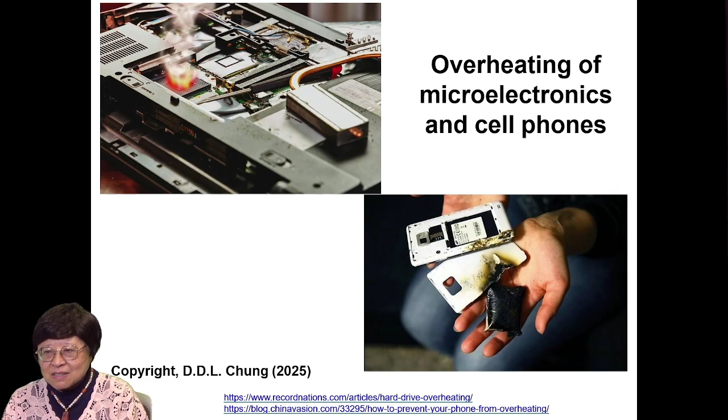Overheating of microelectronics and cell phones is a big problem, and the heat source is very often the microprocessor. So overheating limits reliability, limits further miniaturization, and limits power. Not only microelectronics and cell phones, but also light-emitting diodes need heat dissipation, and electric vehicles with battery packs. The battery needs heat dissipation.

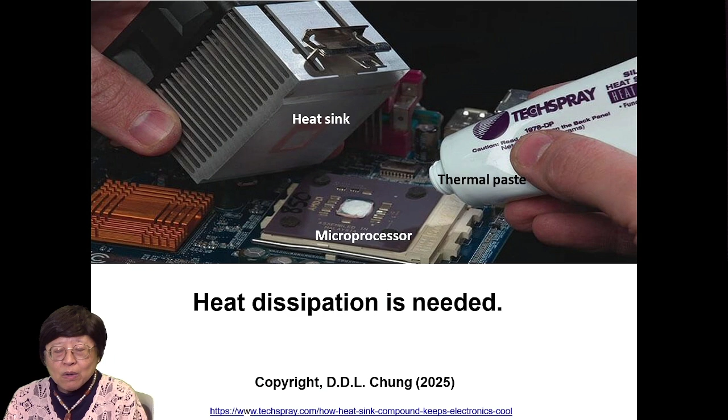Now, how to improve the heat dissipation? Let's say you have a microprocessor and a heat sink above, and you need to improve the thermal contact between these two. So one puts in between the two a thermal interface material, abbreviated TIM. Most often it is in the form of a paste called thermal paste, because the paste is easy to dispense and also low in cost.

TIM market size is increasing, particularly large increase is projected from now to 10 years from now. It's projected to exceed $7 billion by year 2036, with annual increase of around 10%.

The electric vehicle battery is one big area. Also, 5G is another big area. The application sectors include consumer electronics, electric vehicles, data centers, advanced semiconductor packaging, advanced driver assistance system sensors, 5G infrastructure, aerospace and defense, industrial electronics, renewable energy systems, and medical electronics. In particular, consumer electronics is the largest market segment, including smartphones, tablets, and wearable devices.

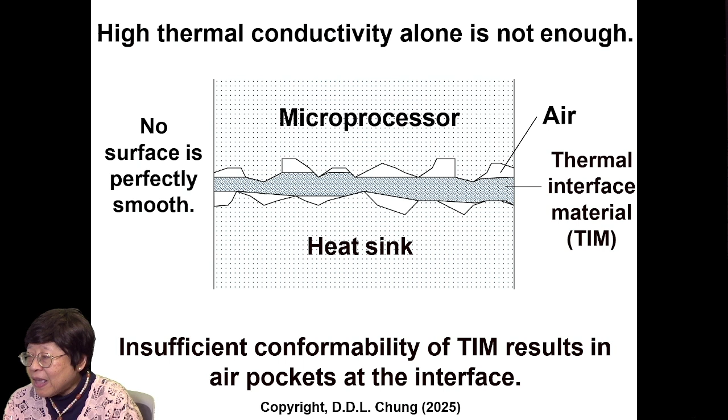Now, high thermal conductivity for the thermal interface material alone is not enough. The reason is no surface is perfectly smooth, so you always have some ups and downs, some air pockets at the interface. The thermal interface material must enter all these little valleys and displace the air out. If you have insufficient conformability of the TIM, you would have air pockets left at the interface, and air is a thermal insulator.

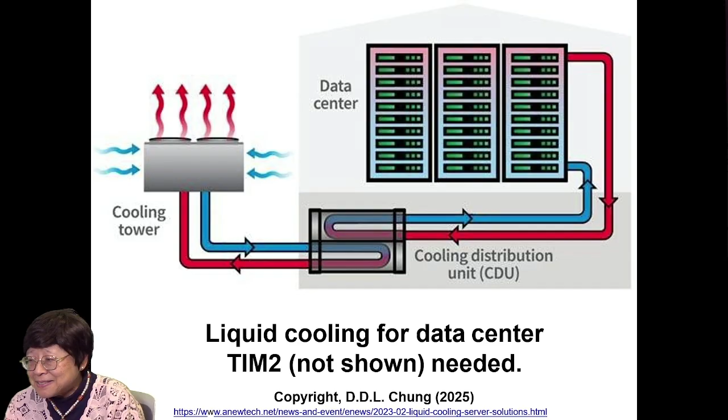For data centers, liquid cooling is the main method of cooling, but it uses a massive amount of water. That is another problem. And TIM2, although not shown here, is needed.

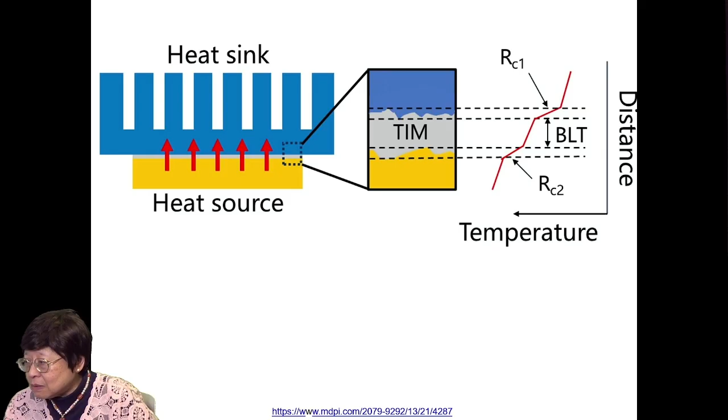This shows that the temperature drop occurs not only within the TIM, but also at each of the two interfaces between the TIM and the adjoining material. So there are three temperature drops here.

The design principle of thermal interface material has long been one thing, which is high thermal conductivity. However, I put forth that there should be another principle, which is very important, and that is conformability. And that results in a paradigm shift in the design principle of thermal interface material. I raised that point back in 2003.

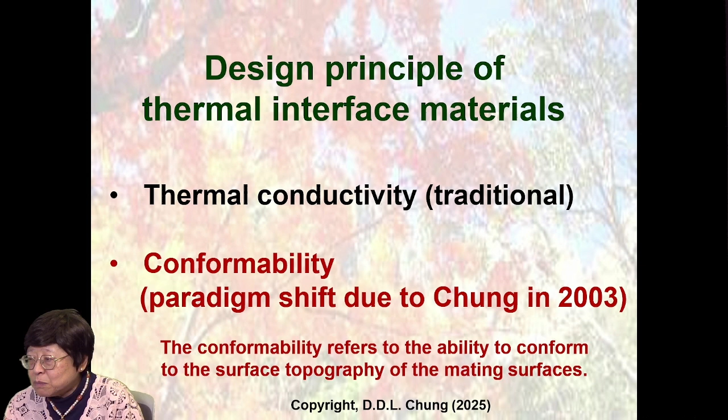The conformability refers to the ability to conform to the surface topography of the adjoining surfaces. I should stress that conformability requires micro-scale kind of conformability. That is different from macro-scale kind of resiliency or macro-scale compressive modulus being low or soft, because the little valleys in the surface topography can be in the micro scale. Silicone, for instance, is resilient and soft, but typically not conformable in the micro scale due to the long length of the molecules.

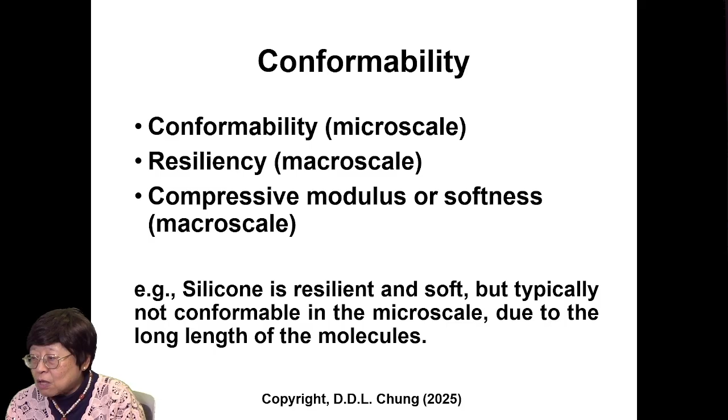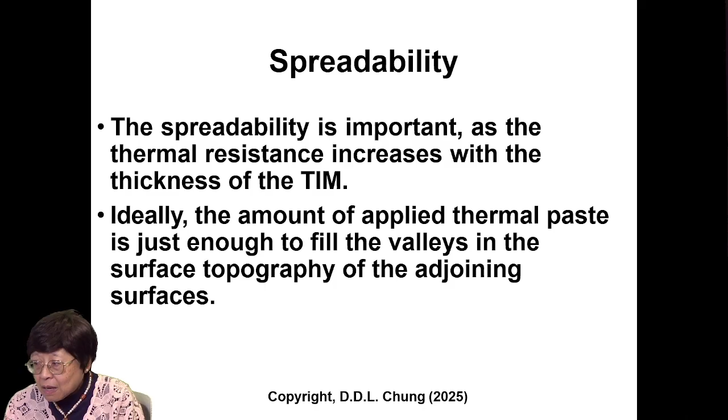Spreadability is also important, as the thermal resistance increases with the thickness of the TIM. Ideally, the amount of applied thermal paste is just enough to fill the valleys in the surface topography of the adjoining surfaces. The properties that affect TIM performance include conformability, spreadability, and thermal conductivity. The thermal paste has in it a solid component and a liquid component. We want both the liquid and solid components to be conformable.

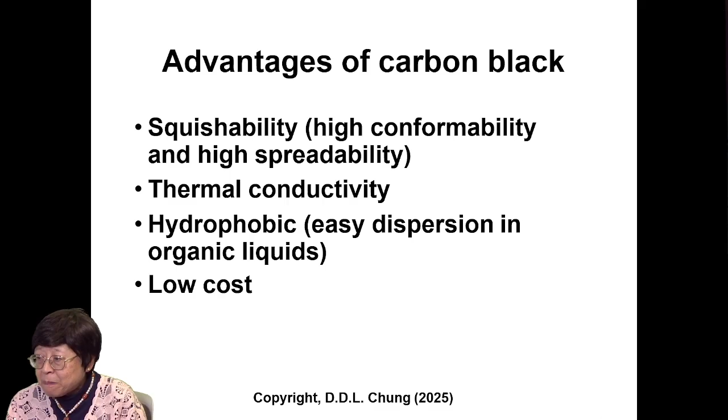Carbon black is advantageous in its squishability, which results in high conformability and high spreadability. In addition, it is thermally conductive. Also, it is hydrophobic, so it's easy to disperse in organic liquids. Also, it's very cheap.

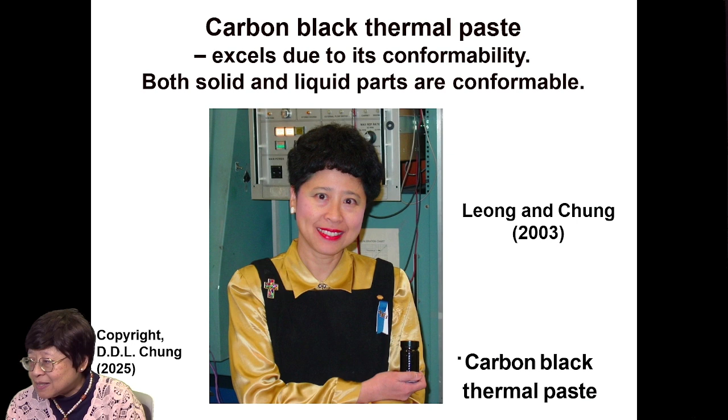So using carbon black, I developed a thermal paste which excels due to its conformability, with both the solid and liquid parts being conformable. This is me holding the black bottle, and it's black because it's carbon black thermal paste. This was reported by me in 2003.

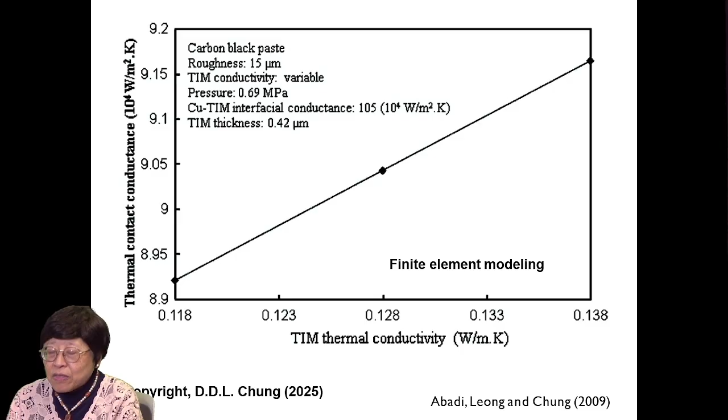The thermal contact conductance, which is the inverse of the thermal contact resistivity, increases with the TIM thermal conductivity with all other conditions fixed. That's kind of obvious.

However, too high a filler content results in low conformability, though high thermal conductivity. So a compromise is needed between conformability and thermal conductivity. In case of carbon black, the optimum is 2.4 volume percent, not very high. The prior design paradigm is to maximize the filler content in order to maximize the thermal conductivity, with no consideration of having an optimum.

Now, the vehicle in the paste is also important. It should not be volatile. It should be organic and not necessarily polymeric, because we don't want long molecules. Small molecules are needed to enter the small valleys in the surface topography.

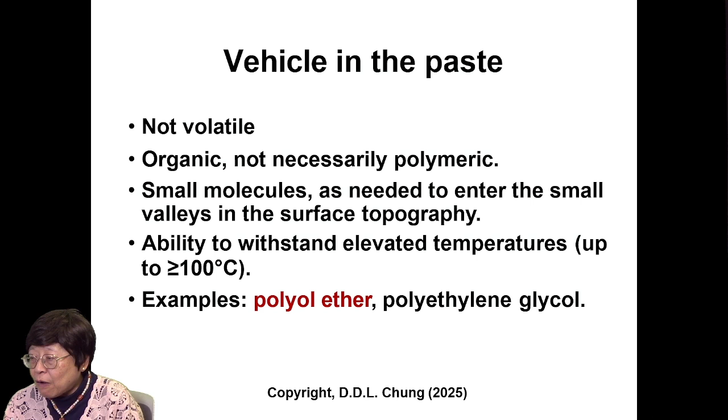Ability to withstand elevated temperatures up to, say, 100 degrees C at least. Examples include polyol ether and polyethylene glycol. Much of what I'm going to talk about involves polyol ether.

Now, the roughness of the adjoining surfaces matters a lot. Higher thermal conductivity is needed for rougher adjoining surfaces due to the larger distance of the heat path. The smoother the adjoining surfaces, the higher is the thermal contact conductance due to the smaller distance of the heat path. So it'd be better to polish your material to make it as smooth as possible.

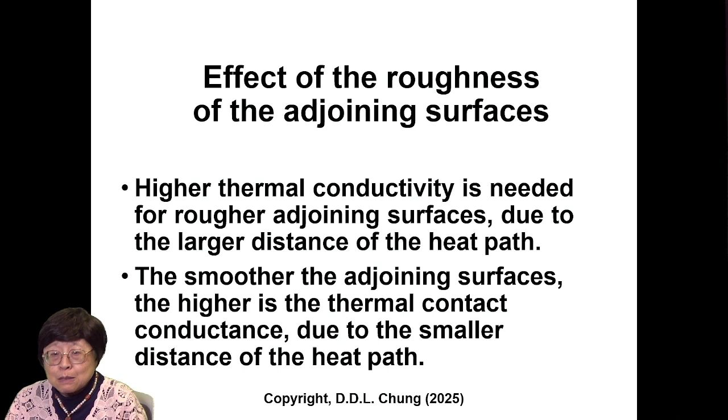The testing conditions include the roughness of the adjoining surfaces, the thickness, the thermal conductivity of the adjoining materials, and the pressure. All conditions must be controlled, otherwise comparison cannot be made among results obtained in different laboratories. First, consider roughness of the adjoining surfaces.

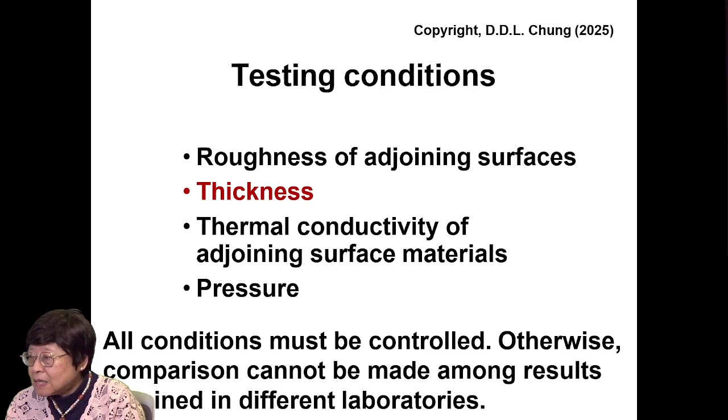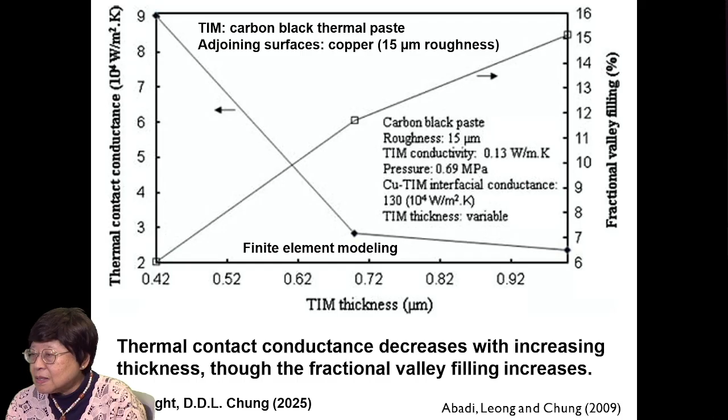Thickness of the TIM, another test condition. Here shows the conductance versus TIM thickness, with again all the other conditions fixed. The greater the TIM thickness, the smaller is the conductance, and the greater is the fractional valley filling.

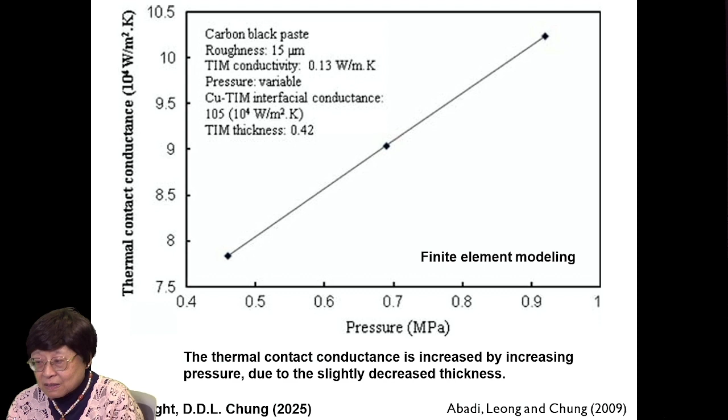Next, pressure, another testing condition. Pressure application promotes the thermal contact conductance, and prior pressure application also helps, in case of carbon black paste at least. This shows the thermal contact conductance versus pressure with all other conditions fixed. The higher the pressure, the higher is the thermal contact conductance, and this is due to the slightly decreased thickness due to the increased pressure.

Next, how do we assess the TIM performance? The testing of TIM performance must involve the measurement of the thermal resistance of the sandwich that consists of the two adjoining surfaces and the sandwiched TIM. A common pitfall is the use of the thermal conductivity of the TIM as tested without the sandwiching to assess the TIM performance. Thermal contact conductance is the inverse of the thermal contact resistivity. Temperature rise of operating electronics is good for a particular application circumstance, but is not good for material characterization.

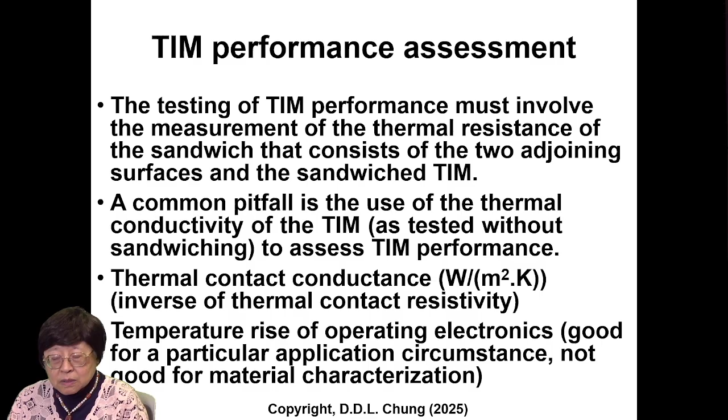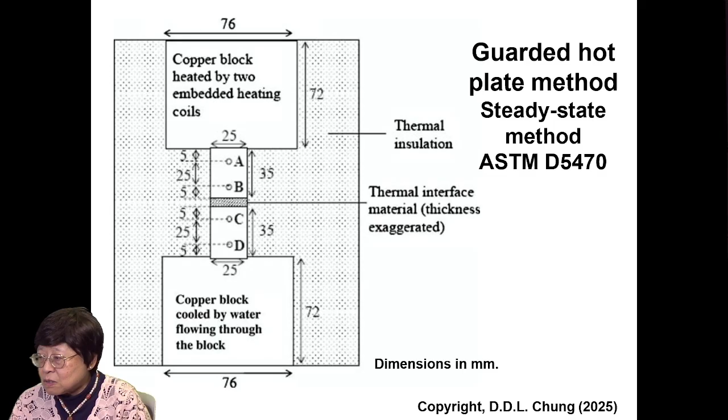For thermal contact conductance measurement, there are two methods: steady-state method and transient method. The guarded hot plate method is the steady-state method, with the heat flux being vertical, and the TIM is sandwiched by two, say, copper blocks, each block having two holes for inserting two thermocouples. So you have A, B, C, D, four points to measure the temperature versus the position in the vertical direction.

The laser flash method is the transient method. You have a pulse of laser flashing on the sandwich, and on the backside of the sandwich is a thermocouple to measure the temperature rise. The rate of the temperature rise reflects the thermal diffusivity, which relates to the thermal conductivity, or the thermal contact conductance in this case.

Now, the thermal paste fillers include carbon black, graphite nanoplatelet, graphene, also carbon nanotube, graphite particles, ceramic particles such as nanoclay, zinc oxide, and hexagonal boron nitride, also fumed alumina particles.

Now, carbon black and graphite nanoplatelet and graphene, let's talk about these first. Carbon black has a nanostructure in which you have nanoparticles making aggregates, and these nanoparticles are just connected by van der Waals forces. So it's very easy to squish down the aggregates. Shown at the left is before the squishing, the right is after, and you can see the squishing is due to the easy movement between the nanoparticles in an aggregate.

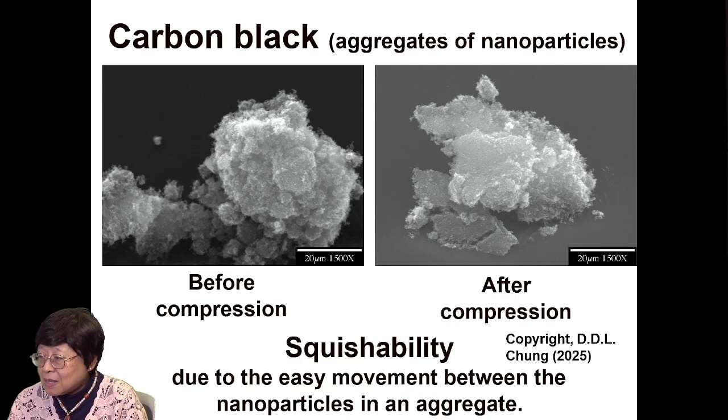This is graphite nanoplatelet. It shows pretty thin platelets. But this is not graphene nanoplatelet. It's not graphene, because the thickness is not below that of 10 layers of carbon. Very often, the thickness is not even known, so one cannot say that it's graphene if you don't know the thickness.

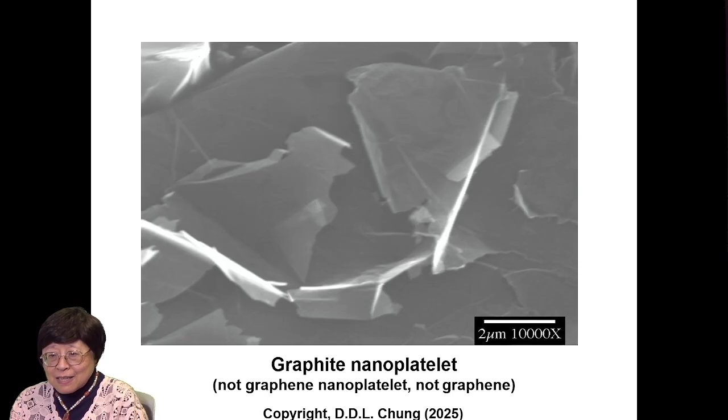The terminology is that you can have a monolayer graphene, 1 layer. You can have 2 to 10 layers, and that's called few-layer graphene. You can have 11 to 30 layers, and that would be not graphene because it's more than 10 layers. That would be graphite nanoplatelet, or just call it graphite. The nomenclature is confusing because graphene is a very fashionable word, much more fashionable than graphite, so people want to call their material graphene even though it is graphite and not graphene.

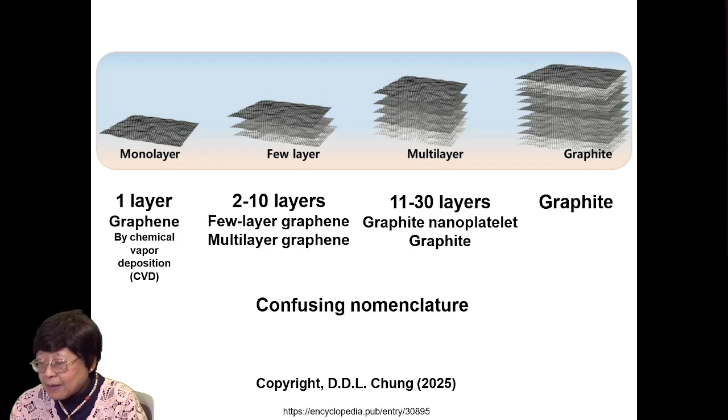Shown here is the comparison of carbon black and graphite nanoplatelet for different volume fractions, showing the thermal contact conductance for rough and smooth copper surface cases, and also the thermal conductivity. For carbon black, the optimum carbon content is 2.4 volume percent, giving the highest value of thermal contact conductance, whether for rough or smooth surfaces. For graphite nanoplatelet, the optimum content is either 1.2 or 2.4 volume percent. The thermal conductivity is higher for graphite nanoplatelet than carbon black.

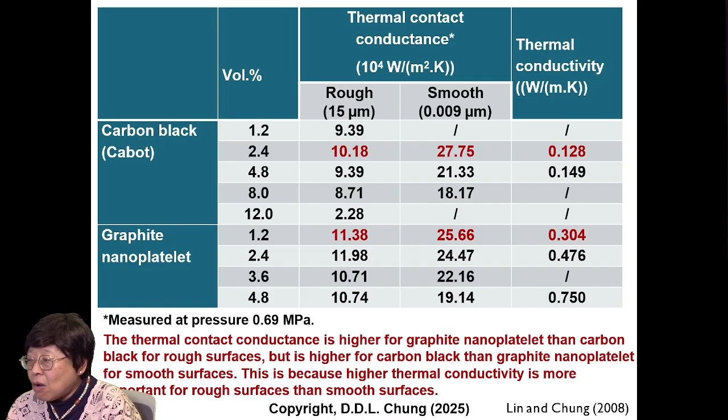The thermal contact conductance is higher for graphite nanoplatelet than carbon black for rough surfaces, but is higher for carbon black than graphite nanoplatelet for smooth surfaces. This is because higher thermal conductivity is more important for rough surfaces than smooth surfaces, and the graphite nanoplatelet has higher thermal conductivity than the carbon black case. The thermal contact conductance is much higher for smooth surfaces than rough surfaces, regardless of the thermal conductivity.

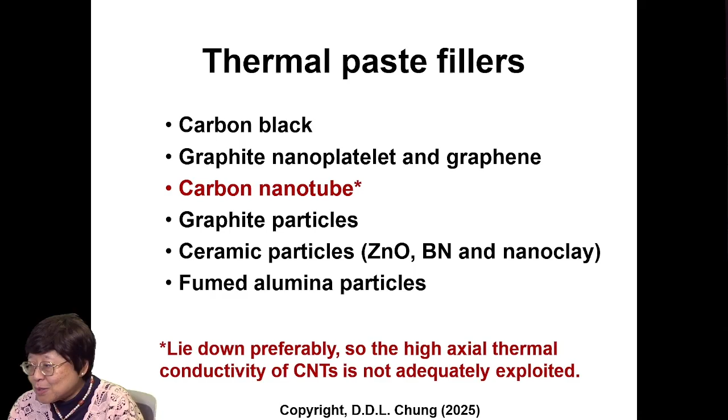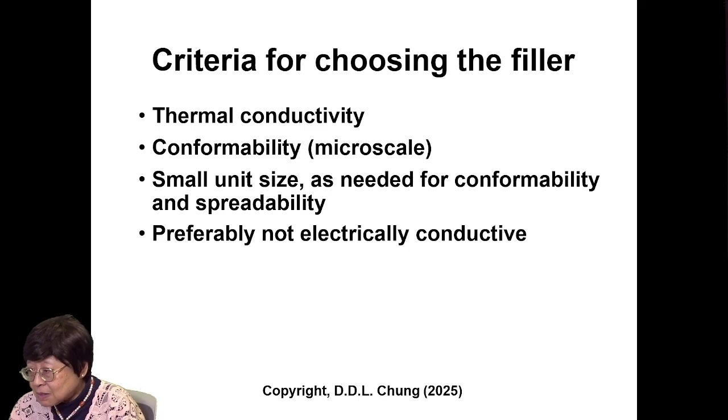Next, consider carbon nanotube. They tend to lie down, so the high axial thermal conductivity of nanotubes is not adequately exploited. The criteria for choosing the filler include thermal conductivity, conformability in the microscale, small unit size as needed for conformability and spreadability, and preferably not electrically conductive. The thermal conductivity is more important when the adjoining surfaces are rougher.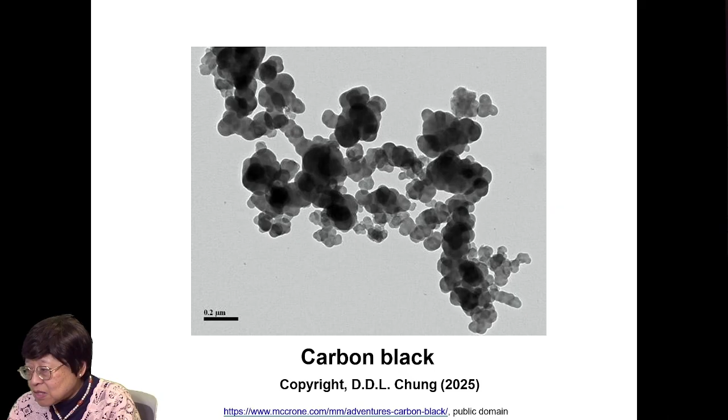Carbon black and fumed alumina both have the morphology of aggregates of nanoparticles, so these two are the only two in the list that are squishable. All the others are not squishable. This is the carbon black, aggregates of nanoparticles, and this is fumed aluminum oxide, also in the form of aggregates of nanoparticles. So the fumed aluminum oxide is similar in structure and conformability to the carbon black, and it's attractive for being not an electrical conductor.

Now, there is low structure carbon black and high structure carbon black. Low structure means the aggregate size is smaller. Low structure is more effective for TIM due to the superior conformability, even though the high structure promotes the thermal connectivity.

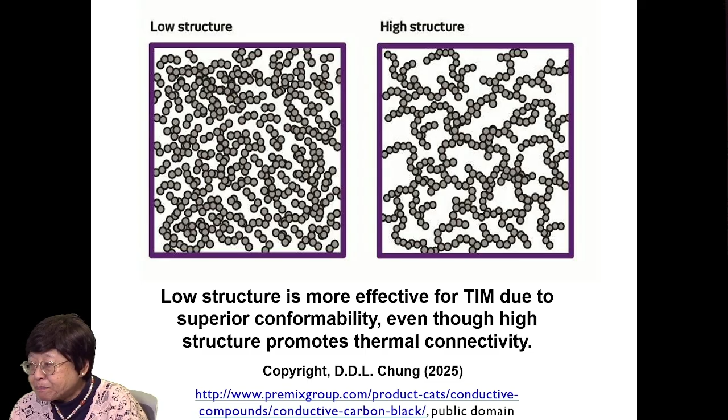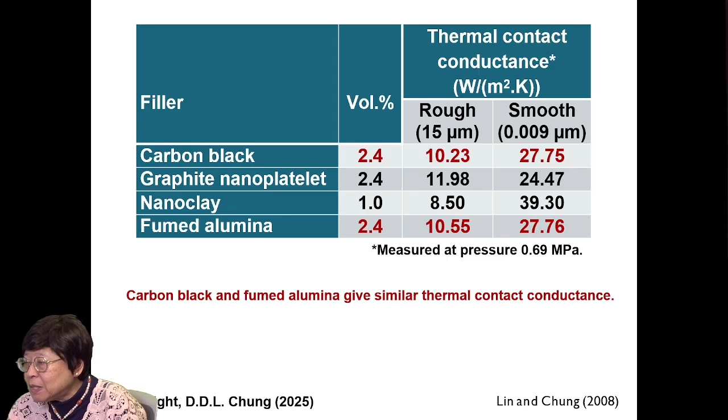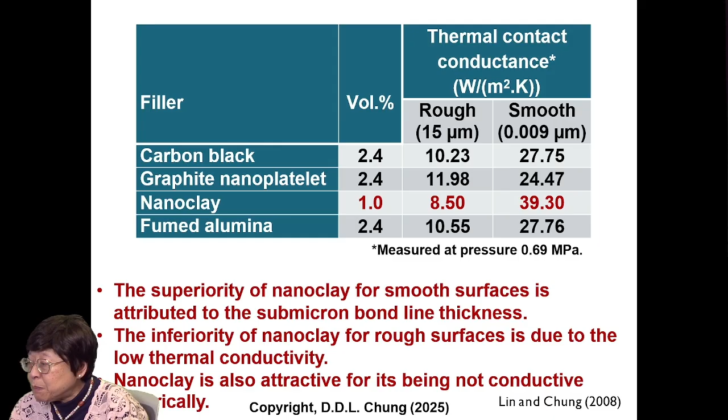Here it compares the thermal contact conductance for these 4 fillers: carbon black, graphite nanoplatelet, nanoclay, and fumed alumina. Carbon black and fumed alumina give similar thermal contact conductance, as you can see, for both rough and smooth surfaces. Nanoclay, in red, the superiority of nanoclay for smooth surfaces is attributed to the submicron bond line thickness. The inferiority of nanoclay for rough surfaces is due to the low thermal conductivity. Nanoclay is also attractive for its being not conductive electrically.

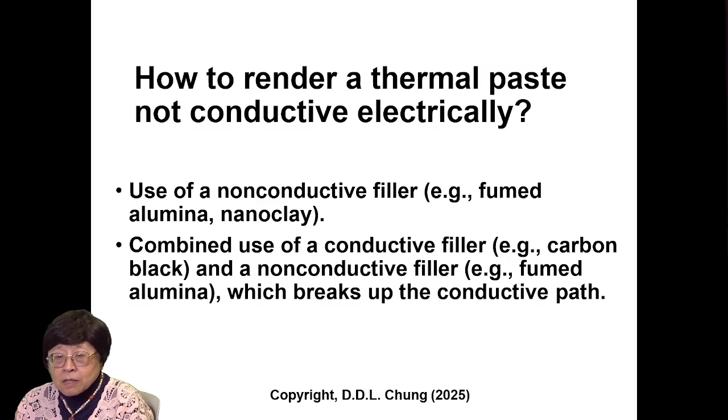Attraction of TIMs that are not conductive electrically is to avoid short-circuiting in case that parts of a TIM drop out. However, electrical non-conductivity is not required for TIMs. Now, how to render a thermal paste not conductive electrically? Well, one way is to use a non-conductive filler, such as the fumed alumina or nanoclay. Another way is the combined use of a conductive filler, such as carbon black, and a non-conductive filler, such as fumed alumina, and the non-conductive filler breaks up the conductive path.

Now, thermally conductive adhesive involving epoxy or silicone is attractive.

Adhesive thermal paste refers to thermal pastes that are adhesives, and they are preferred over non-adhesive ones since there would be no need for fastening to keep the TIM sandwiched by the adjoining surfaces. However, conformability, spreadability, thermal conductivity, and reworkability all tend to be compromised by the inclusion of an adhesive constituent. Work on adhesive thermal paste is little compared to that on non-adhesive thermal paste.

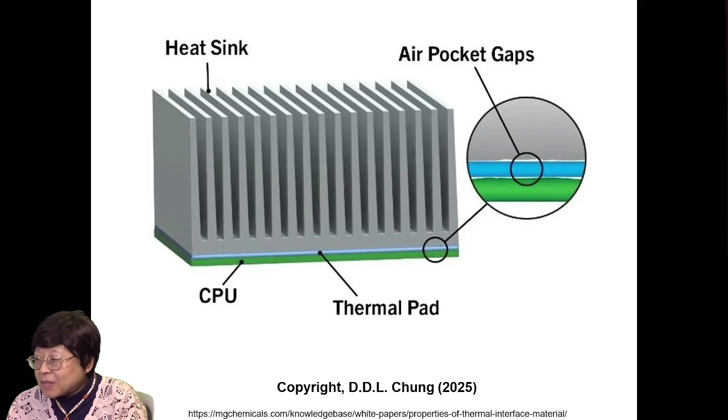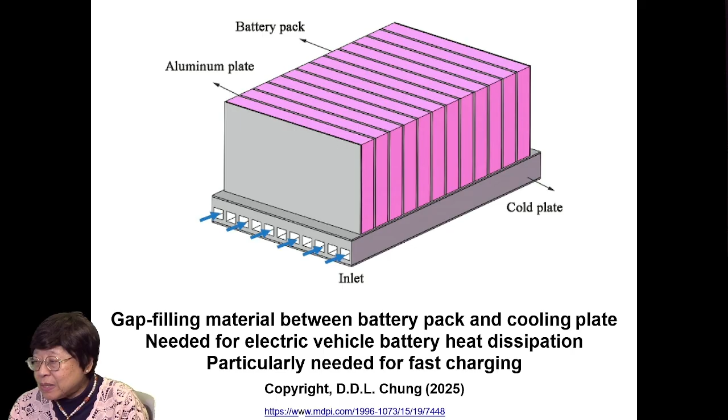This shows a thermal pad at the bottom here between the heatsink and the CPU. This pad is usually called a gap-filling thermal pad, and they can be available in this form, in films and tapes. The gap-filling material here is between the battery pack and the cooling plate. It's needed for electric vehicle battery heat dissipation, and is particularly needed for fast charging.

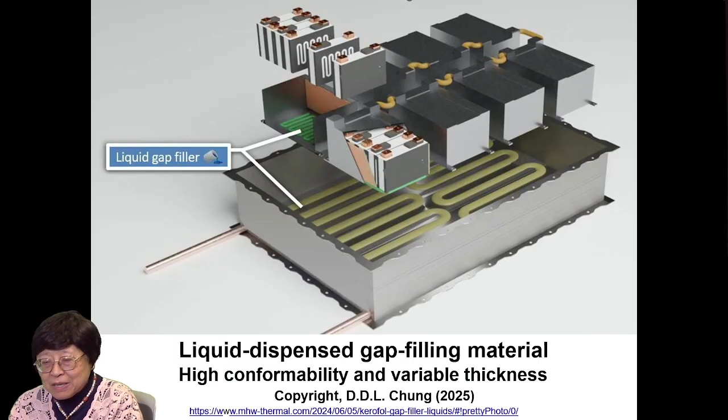Liquid dispensed gap-filling materials, like here, like a snake, give high conformability and variable thickness. However, the gaps between adjacent lines of this pattern are not attractive, because the empty spaces would be just air, which is a thermal insulator.

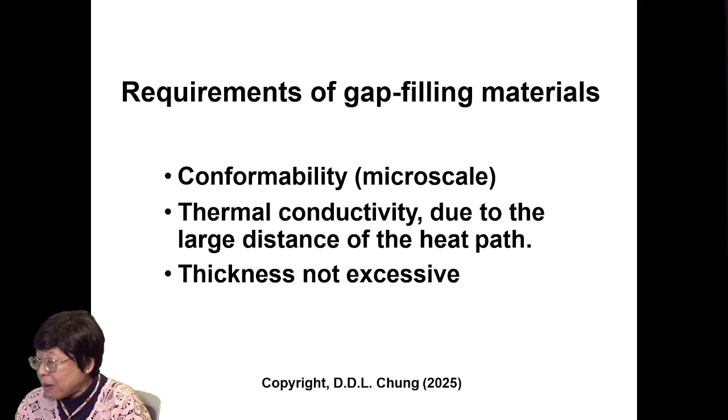Now, why do we need gap filling? Non-parallel adjacent surfaces, curved adjacent surfaces, even a gap between the adjacent surfaces. The requirements of gap-filling materials are: conformability, thermal conductivity due to the large distance of the heat path, and the thickness not excessive. The shortcomings of gap-filling TIMs include low thermal contact conductance compared to thermal paste, due to the large thickness, limited thermal conductivity, and limited conformability.

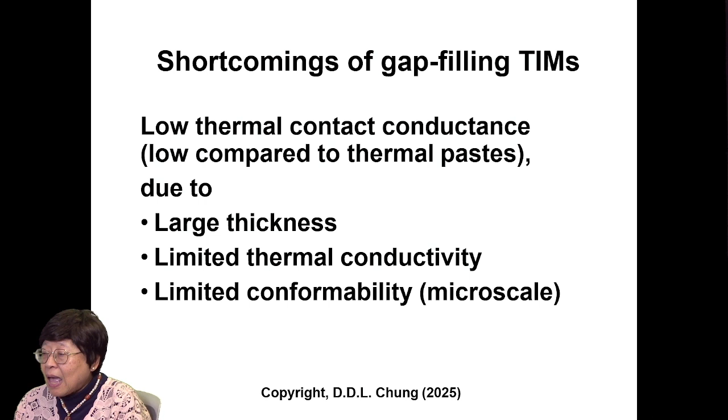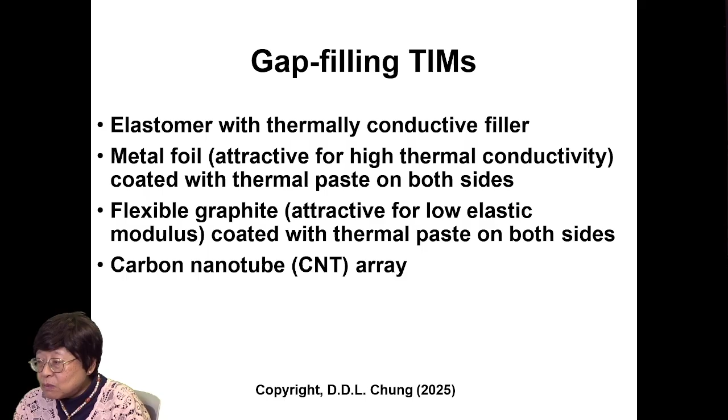The gap-filling TIMs are basically these materials: elastomer with thermally conductive filler, metal foil, which is attractive for high thermal conductivity but coated with thermal paste on both sides, flexible graphite, attractive for low elastic modulus, coated with thermal paste on both sides, and carbon nanotube array. Let's first consider flexible graphite, coated with thermal paste on both sides.

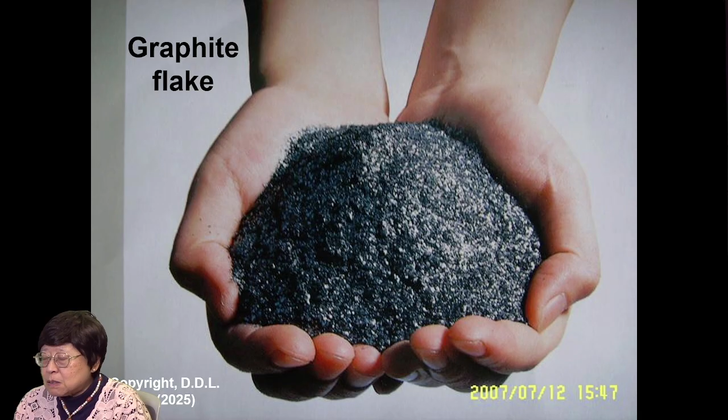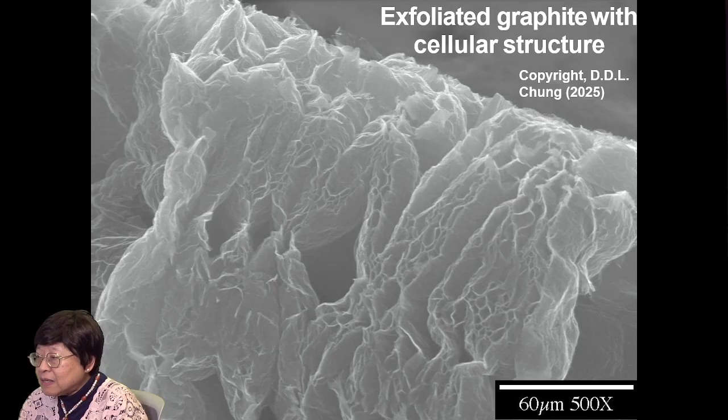When you have a pile of these worms, you can compact them in the absence of a binder. Due to the cellular structure, you have mechanical interlocking, thus resulting in a sheet called flexible graphite.

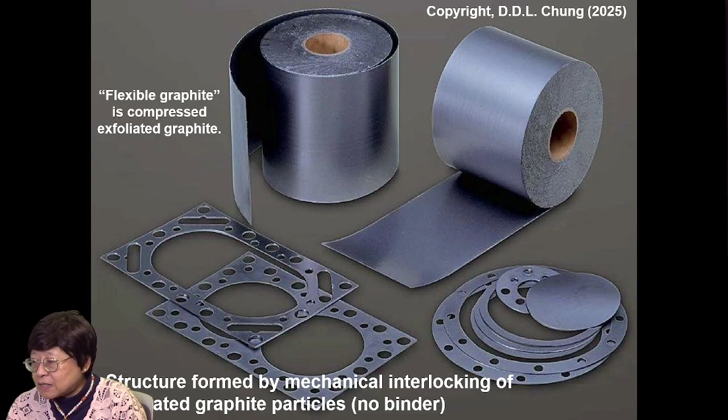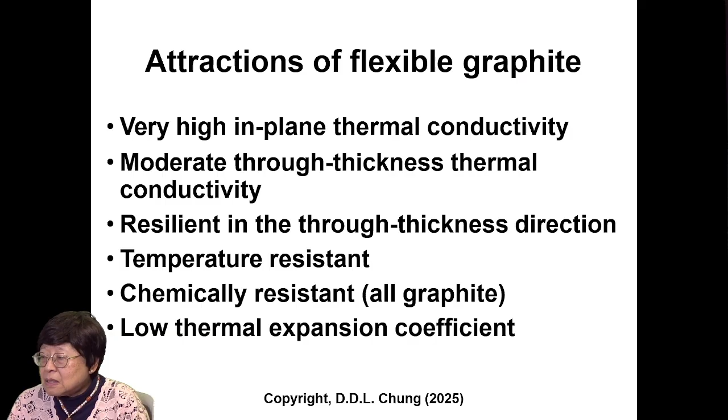The attractions of this sheet include: very high in-plane thermal conductivity, moderate through-thickness thermal conductivity, resilience in the through-thickness direction, and temperature resistance, chemical resistance, since this is all graphite, and low thermal expansion coefficient.

Flexible graphite is widely used as a heat spreader because of the high in-plane thermal conductivity, but it is also used as a gap-filling TIM.

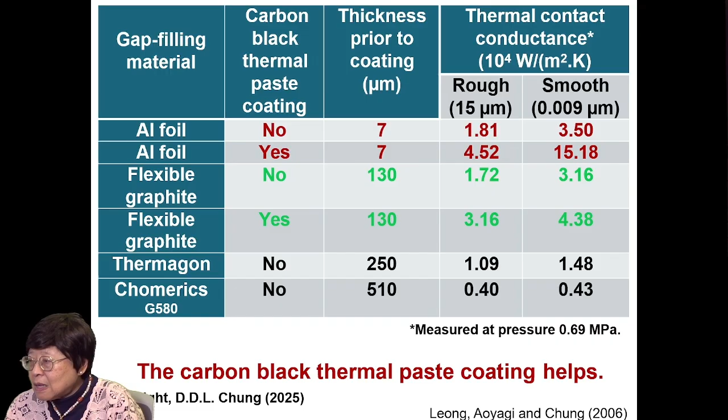Shown here, the carbon black thermal paste coating helps for the aluminum foil. The coating helps. For the flexible graphite, the coating also helps. The aluminum foil is better than the flexible graphite because it is thin and high in thermal conductivity. For both the rough and smooth surfaces, the aluminum foil is better, whether with or without the carbon black thermal paste coating.

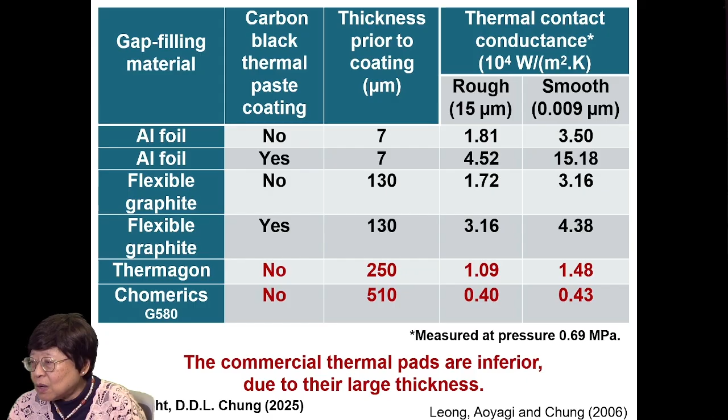The commercial thermal pads, Thermagon and Chomerics, are inferior due to their large thickness. You see the thickness is very large, and that results in very low thermal contact conductance. The aluminum foil with the thermal paste coating is the best in this list. If a larger thickness is needed, flexible graphite is the best.

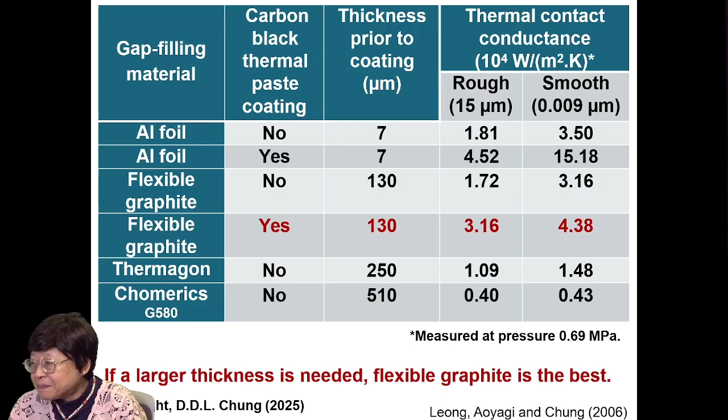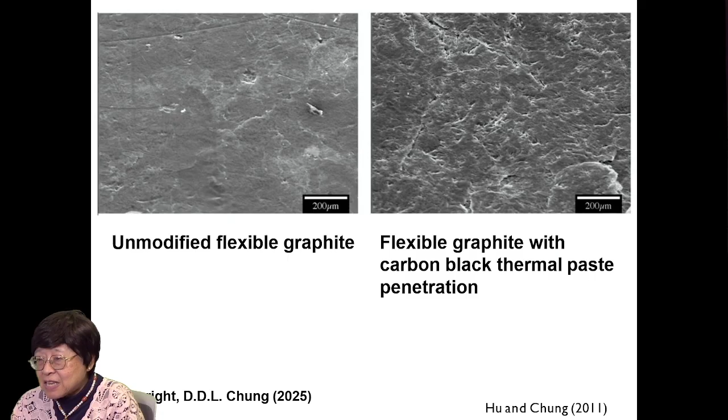Shown here are the flexible graphite with carbon black penetration and flexible graphite with solder. You can see that the thickness is substantial because it's flexible graphite, and the thermal contact conductance from 14 to 17 -- note that there's no coating here, this is all inside, carbon black inside, solder inside -- and the thermal contact conductance for the rough case is shown here. 14 to 17 is the best in this list.

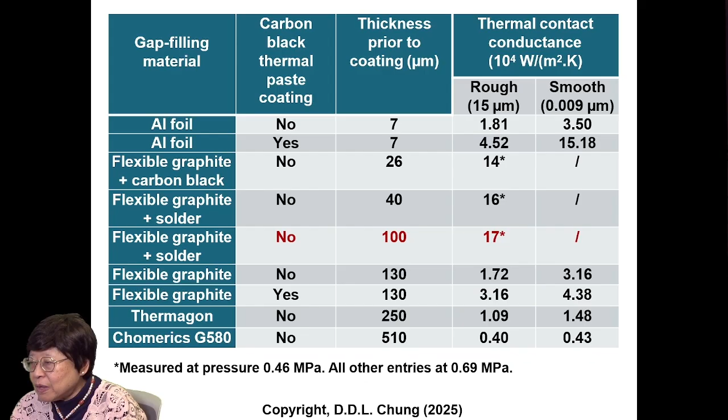And the very best is the graphite 17, which is a flexible graphite with solder particles incorporated.

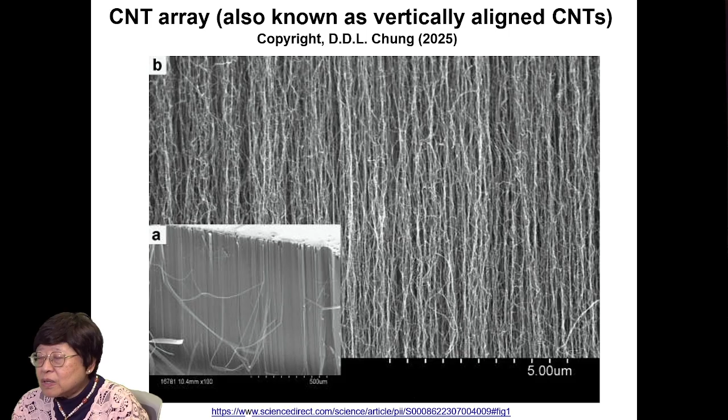How about carbon nanotube array as gap-filling TIM? The CNT array is also known as vertically aligned CNTs, and you can see it's vertically aligned. The attractions are high thermal conductivity of each carbon nanotube in the array, and the substantial length of the nanotubes, making the array attractive as a gap-filling material.

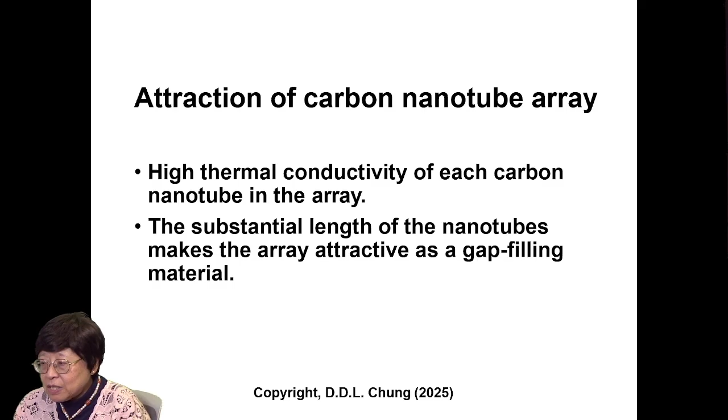However, there are problems. One is that the nanotubes are not all of the same length, so the top is not flat. You need an extra layer of something at the top because the top of the array is not flat. Now, the nanotubes need to be grown catalytically at high temperatures from a substrate that has the catalyst particles on it, and that high temperature of growth limits the kinds of substrates that qualify.

And that means one needs to transfer the array after the growth to another substrate, and that transfer is not simple. So the problems with the CNT arrays are these.

The presence of air between the nanotubes in the array makes the overall array limited in thermal conductivity. The length of the nanotubes are not uniform, so the upper surface of the array is not flat and is not conformable. The upper surface needs an interlayer, such as a solder layer. The thermal conductance is not high. The thickness is large - that's good for gap filling.

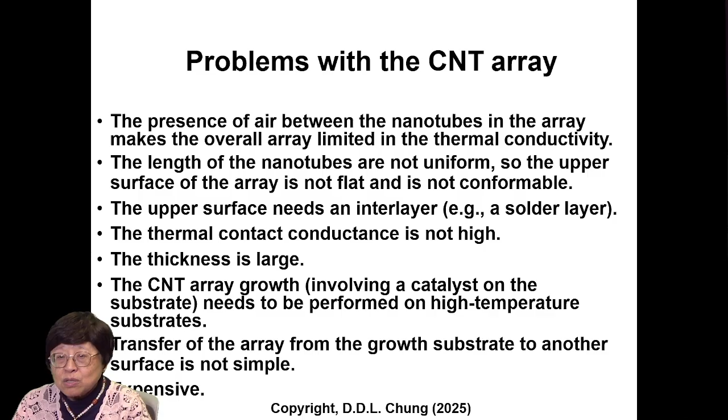The CNT array growth involves catalyst, needs to be performed at high temperatures, and requires high temperature substrates. And the transfer of the array from the growth substrate to another substrate is not simple. Also, the CNT array is very expensive.

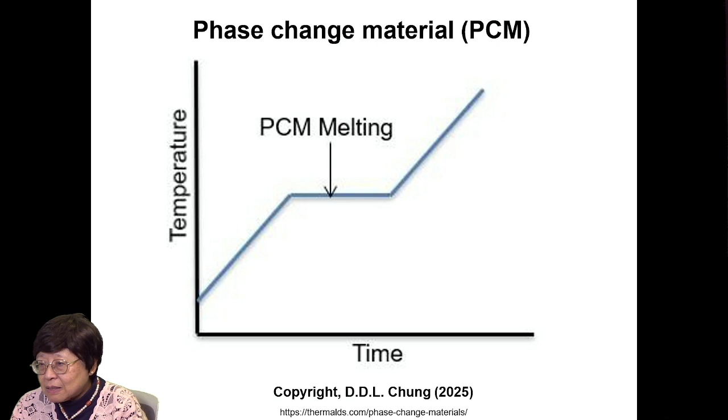Next, consider phase change material, or PCM, and the phase change is melting. Through melting, the TIM becomes conformable, and at least more conformable, and so the TIM performance becomes better. The PCM, or phase change material, functions above the melting temperature, and the molten state provides the fluidity for conformability.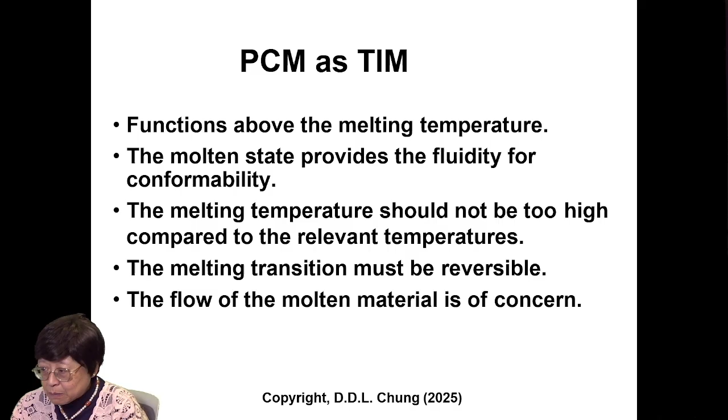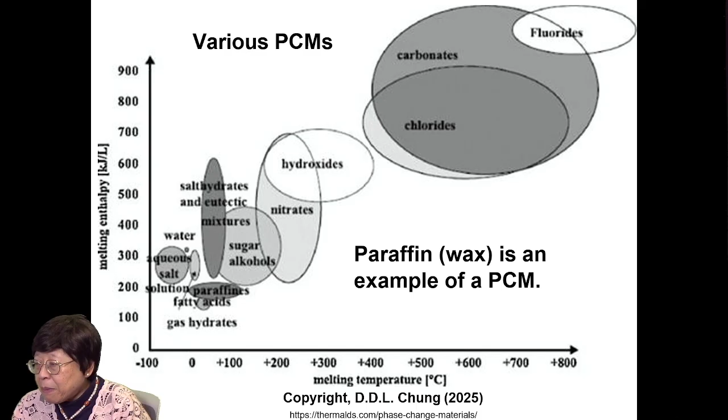The melting temperature should not be too high compared to the relevant temperatures. The melting transition must be reversible. The flow of the molten material is of some concern. There are many types of phase change materials, but we want those at the low temperature range typically, so paraffin or wax is an example.

And this particular phase change material is 98% weight thiopropionate antioxidant with 2% weight sterically hindered phenolic antioxidant as the matrix.

And this antioxidant PCM as the vehicle of the thermal paste gives these values of thermal contact conductance. The conductance is higher for boron nitride than carbon black for rough surfaces, but is higher for carbon black than boron nitride for smooth surfaces.

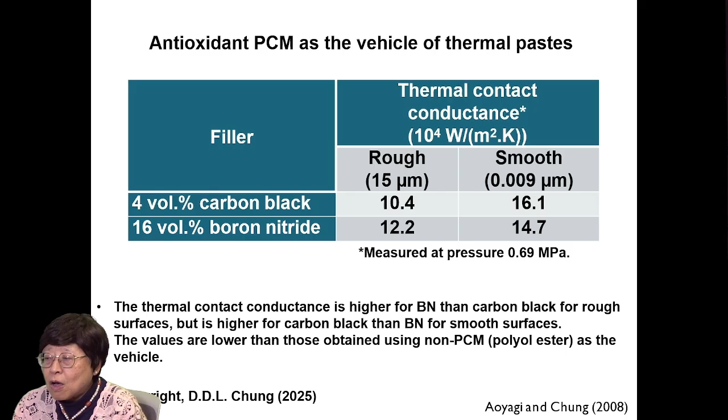The values are lower than those obtained using non-PCM, like polyol ester, as the vehicle. So the PCM performance in terms of thermal contact conductance is not that great.

Shown here is the viscosity of 3 PCMs at 2 shear rates. The antioxidant PCM, which is the bottom row, has higher viscosity than the paraffin wax, which is the upper row. The high viscosity reduces the seepage tendency.

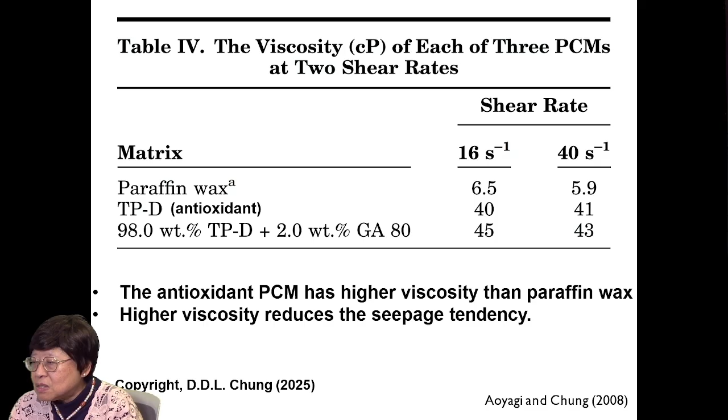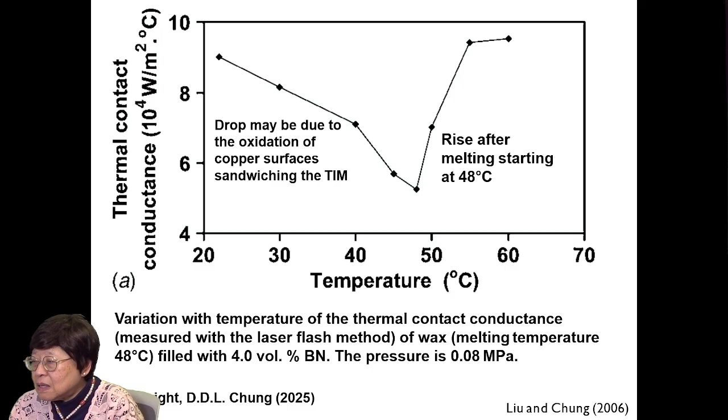Here shows the thermal contact conductance versus temperature for the antioxidant wax as the PCM, filled with 4% boron nitride. You can see the thermal contact conductance drop as you heat, and then further heating causes the conductance to rise. The drop may be due to the oxidation of the copper surfaces sandwiching the TIM. The rise afterward occurs after the start of melting at 48 degrees C for this wax.

Now, phase change material is also available in the form of a thermal pad. Shortcomings of phase change TIMs include these: low thermal conductivity, such as 0.25 watts per meter K for the paraffin case, limited conformability, melting temperature choice limitation, undercooling in solidification, thermal cycling ability limitation, and seepage tendency.

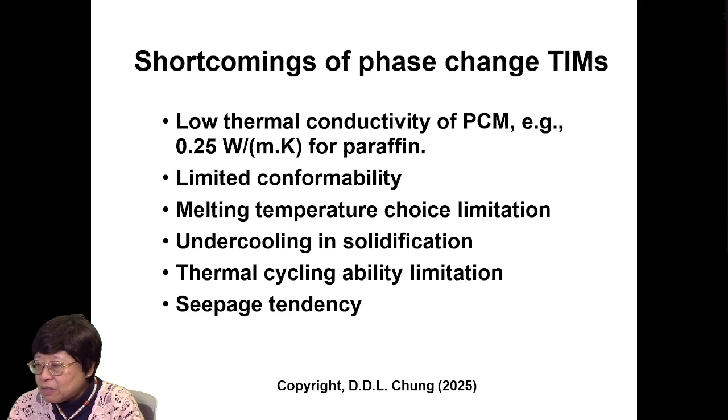However, shortcomings of thermal paste are these: they cannot withstand high temperatures, which are encountered in power electronics. Also, limited thickness.

Liquid metal TIM can be, say, an alloy containing gallium. In this example, the melting temperature is 3 degrees C, so it's a liquid at room temperature. The thermal conductivity is very high because it's a metal. But it's only good for copper or nickel-plated materials, not good for aluminum due to reactivity.

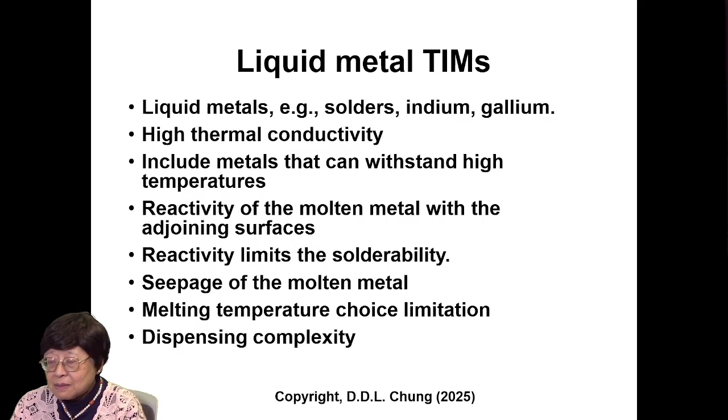In general, liquid metal TIMs can be solders, indium, gallium, and others. They have high thermal conductivity and can withstand high temperatures, but the reactivity of the molten metal with adjoining surfaces is a big concern. The reactivity also limits the solderability, and seepage of the molten metal is a concern. The melting temperature choice is limited, and the dispensing tends to be complex.

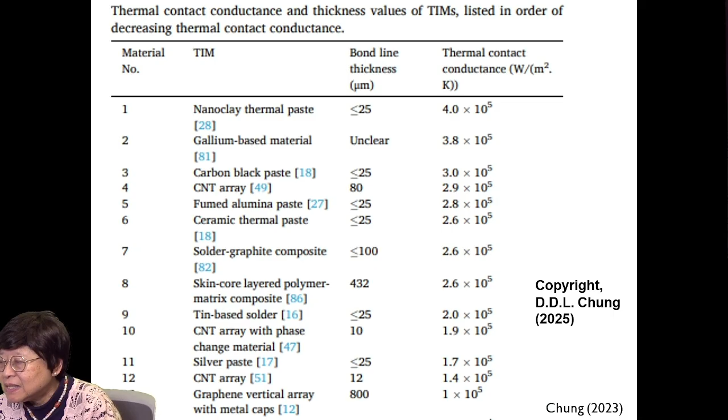Here is a list of the thermal contact conductance and thickness values of TIMs, listed in order of decreasing thermal contact conductance. Nanoclay thermal paste is at the very top, followed by gallium-based material, carbon black paste, CNT array, fumed alumina paste, ceramic thermal paste, solder graphite composite, and so on. The lower the list, the worse it is.

However, not shown in this list is very new work reported by Cheng in 2025. It is liquid metal infused copper nanowire array: a copper nanowire, 0.8 micron diameter array on each side of a copper foil, with the liquid metal infiltrated into the arrays.

This TIM has thickness 60 microns. The thermal contact conductance reaches 1 times 10 to the 6 watts per meter square K, which is higher than that of the best in the list I showed you. The roughness of the copper blocks sandwiching the TIM is not reported. As I said, the roughness needs to be specified, otherwise you cannot compare apple with apple, but it is not revealed in this paper.

The thermal conductivity is very high since it's all metal, 70 watts per meter K, and the thermal contact conductance is higher than the value of 4 times 10 to the 5 watts per meter square K for the best material in my list just shown, that being nanoclay thermal paste. But again, the comparison might not be fair because the roughness is not revealed in this 2025 work by Cheng.

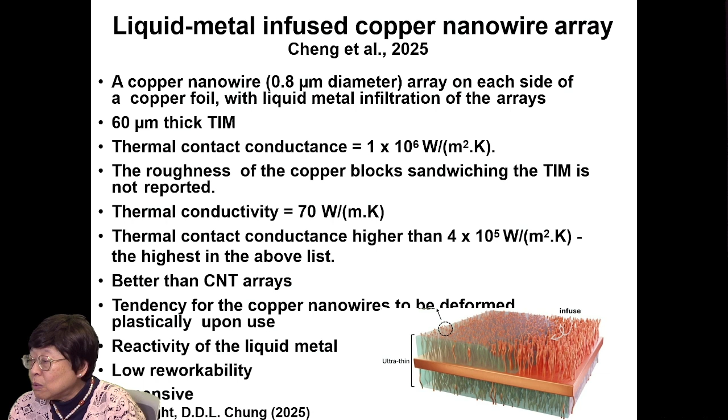This material is better than the CNT arrays in performance. However, there's a tendency for the copper nanowires to be deformed plastically upon use. The reactivity of the liquid metal is of concern, and also low reworkability, and it's also expensive.

Most recent work on TIM development focuses on composite structures, such as liquid metal infused copper nanowire array, also CNT array without and with phase change material, solder graphite composite, skin core layered polymer matrix composite, graphene vertical array with and without metal caps, graphene hydrogel with phase change material, CNT paper, carbon fiber vertical array, graphite powder with CNT, vertical graphene with horizontal graphene top and bottom, and graphene CNT aerogels.

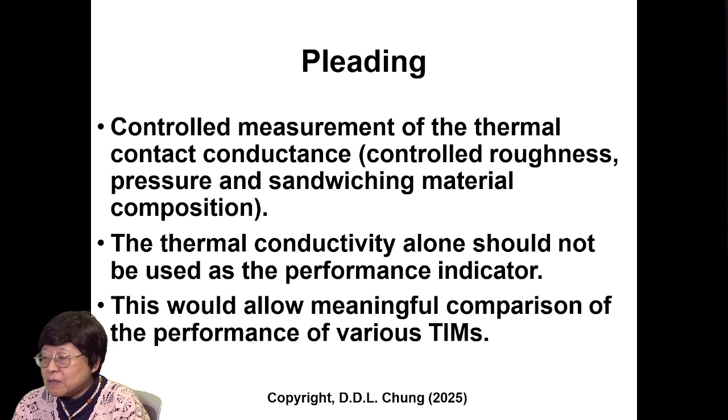My pleading: controlled measurement of the thermal contact conductance, meaning controlled roughness, pressure, and sandwiching material composition. Otherwise, we cannot compare apple with apple. The thermal conductivity alone should not be used as the performance indicator. This would allow meaningful comparison of the performance of various TIMs, particularly from various research groups.

The status of the field of TIMs: the TIMs market is rising greatly towards $7.5 billion in year 2036. The research field is growing tremendously with almost 7,000 publications in 2024. Most recent research focused on TIMs with complex composite structures, with little attention on thermal pastes.

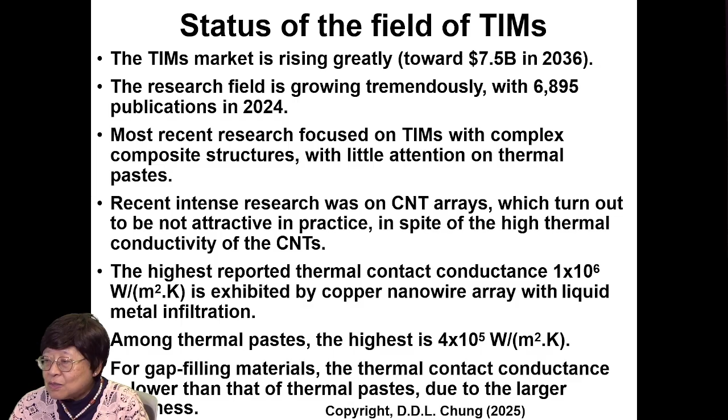Recent intense research on CNT arrays, which turn out to be not attractive in practice, in spite of the high thermal conductivity of the CNTs. The highest reported thermal contact conductance, 1 × 10⁶ watts per meter square K, is exhibited by copper nanowire array with liquid metal infiltration. Among thermal pastes, the highest is 4 × 10⁵ watts per meter square K. For gap-filling materials, the thermal contact conductance is lower than that of thermal pastes due to the larger thickness.

The science of TIMs is insufficiently recognized in the industry or research field. Numerous TIM products in the market and a substantial fraction of TIMs research publications report the thermal conductivity, but not the thermal contact conductance. Numerous reported TIMs cannot be compared to other TIMs in terms of performance due to the absence of thermal contact conductance results.

Liquid metal TIMs suffer from their reactivity in spite of the high thermal conductivity.

Suggestions for future work: more attention on thermal pastes as opposed to TIMs with complex composite structures. Thermal pastes that are adhesives, TIMs that are not electrically conductive, gap-filling TIMs with thickness exceeding 50 microns, TIMs capable of high temperature use, and more attention on TIMs that are cost effective.